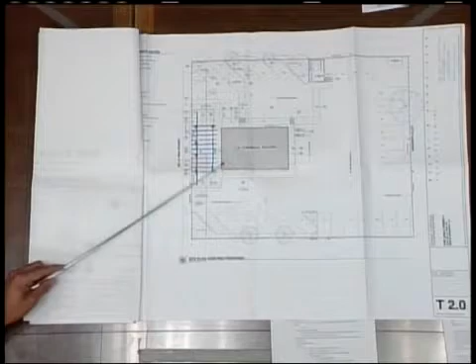All right, good morning. So as you said, the project is located at 2912 De La Vina, and we have a 17,800 square foot parcel that is in the C2 zone and also part of the SD2 overlay zone. Current development on the site consists of a 1,200 square foot commercial building, a fast food restaurant, a 450 square foot front patio seating area, as well as an existing parking lot.

The proposed development is a 270 square foot lateral expansion of the front patio, a new trellis to provide shade for the seating area, new awnings on the north, east, and south elevations, a relocated ADA path of travel, as well as altered driveway aprons. Transportation has reviewed the alterations to the driveway and is supportive of the proposal.

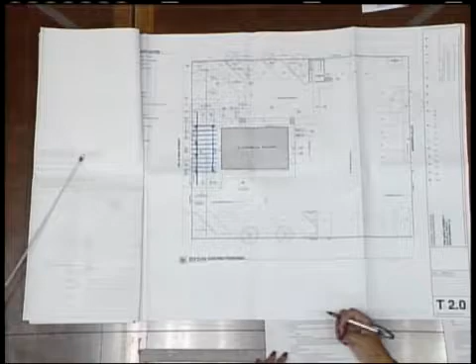ABR has reviewed this project, and the board expressed support for the modification as proposed and continued the item indefinitely to today's hearing. The request before you today is a front setback modification to allow the trellis to encroach into the front setback in this area. For a little background, it's in the C2 zone, which does not require a front setback, but the SD2 zone has a 10-foot front setback requirement.

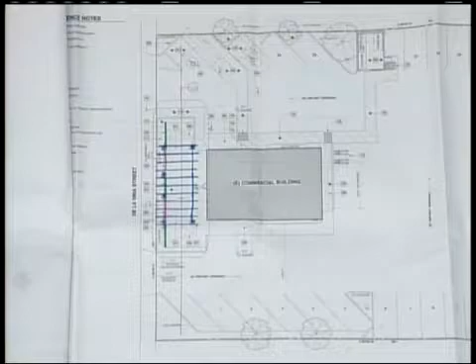It's important to note that the SD2 zone was established to impose certain traffic-related restrictions, but this property has already satisfied the 10-foot Hollister Street setback. This project is a lateral expansion of the patio on either side of the existing patio. It will include an expansion of the existing 26-inch high stone wall. The existing wall, shown in red, is located 2.5 feet from the front property line. The new wall will be of the same style and height, shown in green, and the posts of the shade trellis will be incorporated into that stone wall.

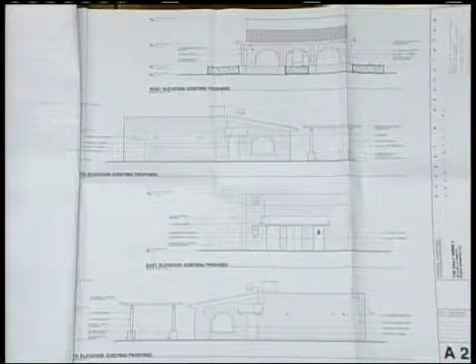It can be better seen on the elevations here, the new walls. As you can see in the elevation, the eaves of the trellis will encroach right up to the property line. For this reason staff is not supportive of the front setback modification, because we believe the trellis will have an adverse effect on the openness of the streetscape. However, staff would be supportive of a redesign of either a smaller trellis or attaching the trellis to the structure for an encroachment of no more than 5 feet into the front setback. And that concludes staff's presentation.

Okay, thank you. Now to the applicant, if you can introduce yourself and make any presentation or additional comments. Sure. My name is Lauren Decent. I work for Sherry & Associates Architects. As you can see, we got positive comments from ABR as well as the neighbors in the area. We do have site photos in the file that show several examples of similar encroachments along the same street. So we feel it's in keeping with the neighborhood scape.

In reviewing staff's recommendation for a redesign with a 5-foot setback, we feel our encroachment is only an additional 2.5 feet because the setback is to the post, not the eave encroachment. Because of the existing wall and pilasters, from a design standpoint it makes sense to use the existing structural elements to support the trellis rather than redesign it with a post just 2.5 feet back. So for those reasons, we request that the mod be considered as submitted. Okay.

So I did do a site visit yesterday to the area to see if there were any encroachments. It did appear that the whole streetscape along this side as well as across the street did have some buffer. I don't know if they all met the 10 feet or less or more, but I didn't see many properties that.

Sorry, where are the additional photos that we brought to our last ABR hearing? I think we have several large printed. I believe they're in the ABR design review file. Oh, those are. Can we grab that?

Also to note that Public Works has said that there's no issue with the Hollister Street setback with this proposal because it's not a building, it's a trellis.

I think those photos are... I realize the trellis will still be open, the area will be open, and it's a nice outdoor seating area. But I am kind of feeling that to allow the overhead members of the trellis on top to go all the way to the property line, I can understand why staff doesn't support that.

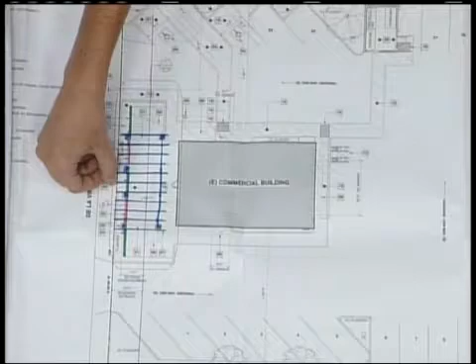And so we would actually extend the hedge right in front. So the trellis really would only extend over the existing landscape. It wouldn't be on any hardscape where anyone would be walking under. So for that reason also, we don't think that it's such a problem. And then, yes, we're proposing to continue the hedge along and wrap it on each side to buffer the additional seating and patio space.

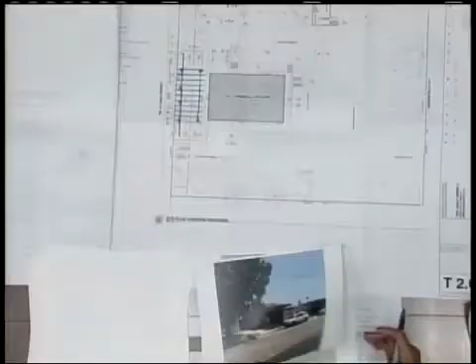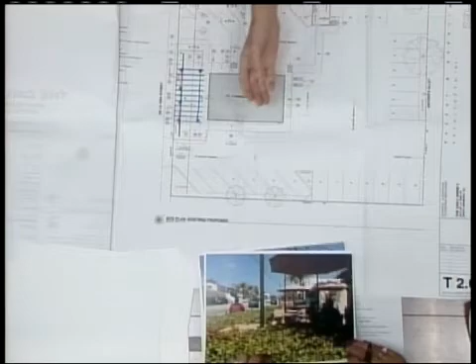What is this here, part of the fan? Can I see that? Oh, so this is the existing pilaster, and that's where we're proposing installing the post in the center of it, because it's already there, it would be a nice structural support. These would remain as well. Those are these blue.

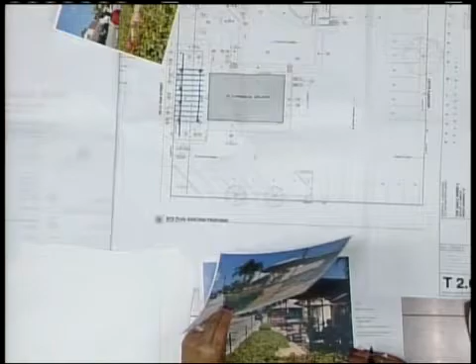I know you went to the Architectural Board of Review and they were supportive of the project, but I do feel that all the way to the property line would be too much of an encroachment. And I understand you're wanting to use the existing posts. Is there a way that we could shorten the eave extension so they're not as long, if we go to the elevations?

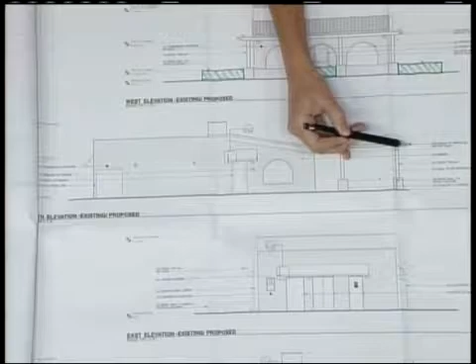So if this is the street, if we're able to keep the post there, we could potentially cut it back an extra foot or so, so it's not right up against the property line. And that would kind of be the best of both worlds in that we can keep the design aesthetic, not have an extra post installed here with the pilaster there, and also provide shade for the whole seating area, but give a little bit of relief from the property line. Consider that.

If I could ask the applicant, so looking on this elevation, this doesn't have the planter, but the planter actually comes out to about the same level, right, to the property line as well. So it probably would have been good to show that too. Yeah, okay, it's shown in plan view, but I think you're right that if we would have shown the hedge comes up here, it shows that the eaves really don't stick out so far. You know, the sidewalk really doesn't start till over here.

So I'd like to open the public hearing. I don't see anyone. We did receive one letter from Carol Van Sand in support of the project. I can close the public hearing.

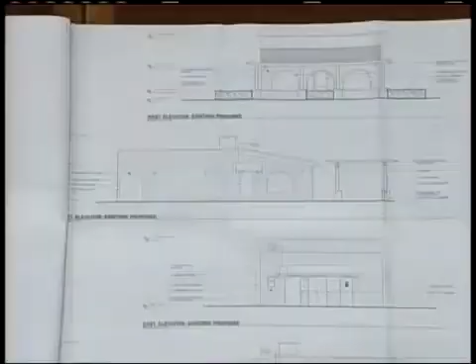Any other comments from the applicant or staff? I like the idea of cutting back the eave. From a design standpoint, what if you ended the whole eave if you didn't have an overhang? We have existing rafter tails coming off of the structure that we think it's important to match. I think ABR would also agree with that. So we would definitely need to have that extension off of the post and then a little bit of the base so that it's not dying right into the other beam. So I don't see a way that ABR would support it if we just had it stop there.

It's about 2 and 1/4, 2.5, about 2 and 1/2. How long is this? 2.

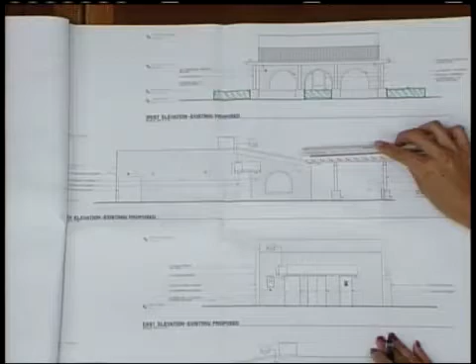Well, including the gutter, it's about 2 feet, 1.5 without. This is a smaller member, so it's the same proportions, so it wouldn't have to be as long as that. But you can see the design of it, the way that it's trimmed. We would need to keep that, so I think we could probably start that element here, which would be about a foot that we could remove.

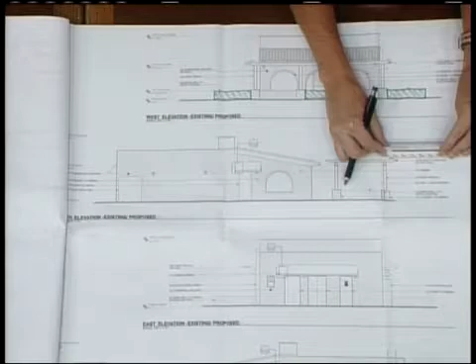Present that to ABR and see how they feel about it. How far up does the hedge go? The planter area? Let's take a look at the plan. I just think the planter gives a nice break from the sidewalk, and to have the eaves all the way to the end is just...

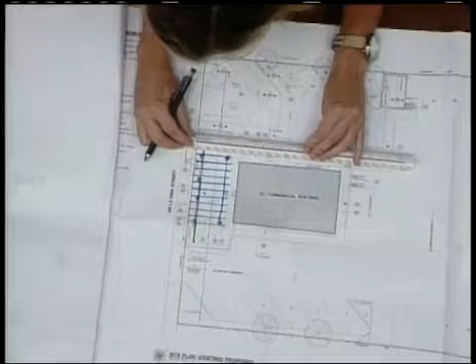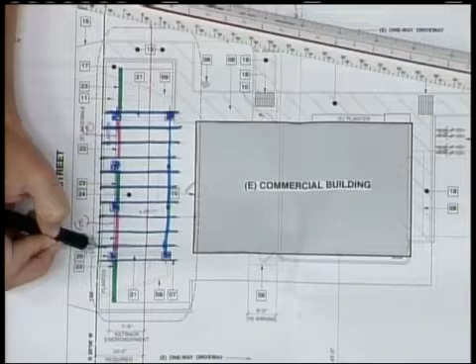So the planter currently is about 1.5 feet further out from where you're proposing the end of the eave? Yes. Oh, no, further from where the post would be. So the post would be here, and currently the eaves are proposed to go all the way to the end of the planter. So if we took off a foot, there would still be about 6 inches of planter with the curbs, which the plants spill over. So about an extra foot of hedge before you get to the sidewalk.

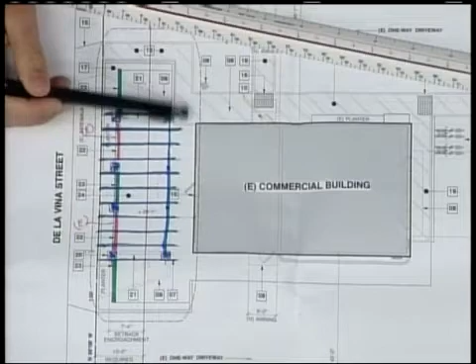Yeah, I think it's too close. When you're on that sidewalk and that frontage, it's just going to appear very close to the sidewalk. And the sidewalk is also sloped down, so it's significantly lower. Between here and here, there's a great distance where the finished floor is much higher here than here. There was a ramp leading up to the front, which is also why we're proposing relocating this, because then there's less of a slope for the handicap access.

So it's not like the eaves are just right at this height. They're much higher than they even would be if you were sitting on the patio. I think I would be supportive of having the posts at 5 feet back and allowing the 2 feet or whatever it is that you're proposing of the overhang of the eave to come out in front of it. But having the post structure 5 feet back as recommended by staff.

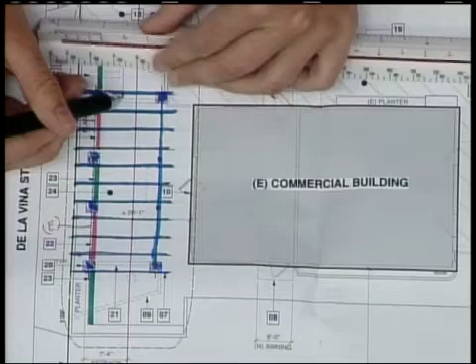So, can I get... if we go 5 feet back, and this is currently 1.5 to center line, it's 3.5 feet that we would have to have the post come here, and then there's a pilaster 2 feet there. So we're really now restricting our ADA access and seating plan because we have an additional post in the middle of the plan here.

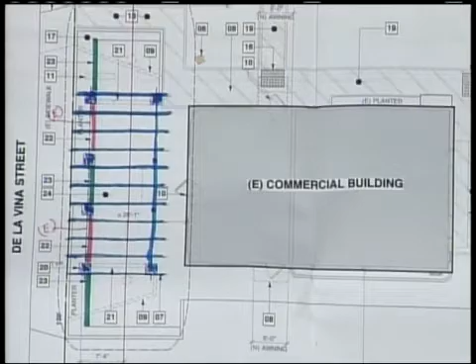So, where's your ADA access though that you're restricting? Well, we have a whole seating plan. I mean, there will be tables and chairs there. But you're able to move the seating around, so they're not... So if we have a post now here, I think we're just really kind of breaking up the space and limiting the ability for flexible seating.

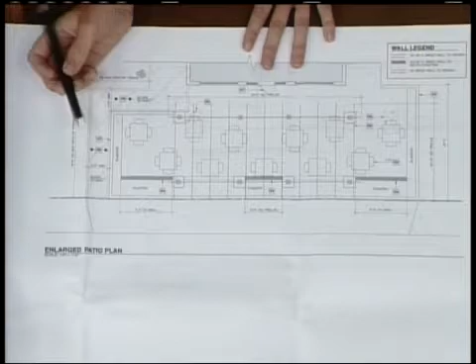I think that's something to consider. But you're also expanding your seating, so you'll end up with more seating than you have there now. So I would be inclined to still require the posts to be 5 feet back and have the massing of the trellis pushed back.

So I am going to... Yeah, it's going to look really funny. I don't think ABR will like that. Okay, so I am going to...

Amend the staff recommendation, Kathy, that the staff hearing officer finds the modification is consistent with the purposes and intent of the zoning ordinance and is necessary to secure an improvement on the lot. A trellis with the posts that encroach 5 feet into the setback, with the rafter tails allowed to extend out as shown on the plans, I believe around 2.5 feet, because it is consistent with the intent of the SD2 zone and will not adversely impact visual openness of the streetscape.

And I'd also like to add a condition that the screening planting along the front remain, to provide that buffer between the sidewalk and the seating area.